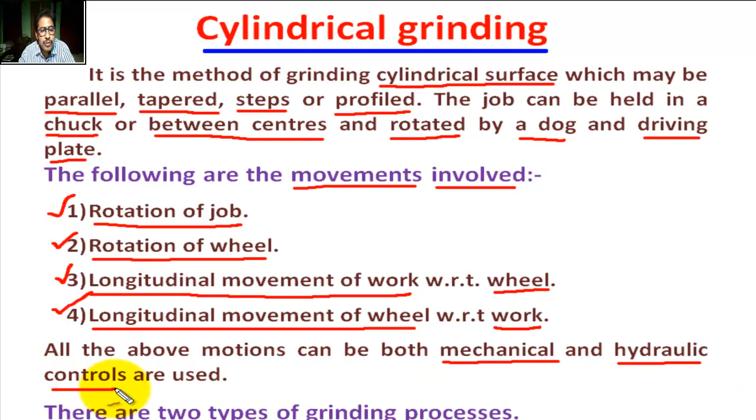All the above motions can be both mechanical and hydraulic controls are used.

There are two types of grinding processes. Number 1, traverse grinding.

The work, meaning cylindrical type work, is reciprocated as the wheel feeds to produce a cylinder. Produce cylinder means the job surface, work surface to be ground, is longer than the width of the wheel face.

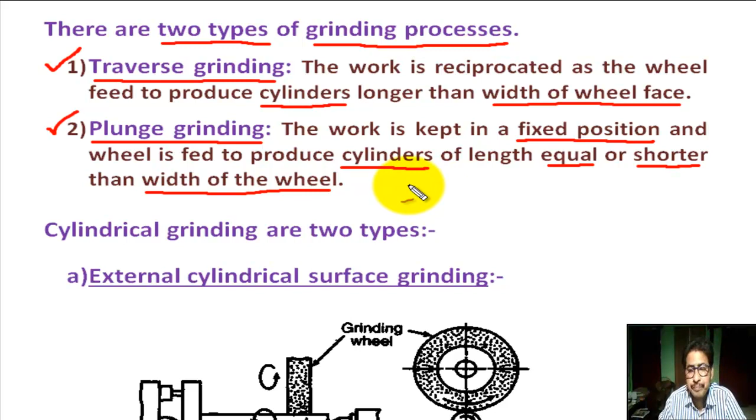Cylindrical grinding are two types: A, external cylindrical surface grinding; B, internal cylindrical surface grinding. Here we do not discuss centerless grinding. For centerless grinding, I developed a separate tutorial, kindly see my separate tutorial.

Cylindrical grinding are of two types. First, A, external cylindrical surface grinding. This is the job or workpiece, cylindrical shape, held in a lathe. This is live center, this is dead center of lathe. This is driving plate, this is lathe dog.

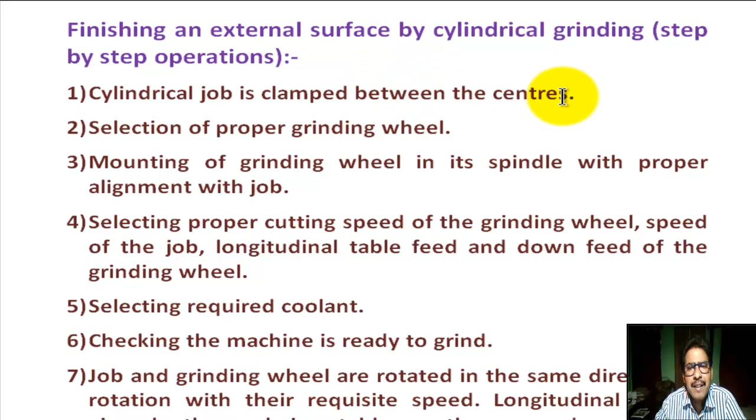Now, finishing an external surface by cylindrical grinding, step by step operation. Number 1, cylindrical job is clamped between the centers.

Number 2, selection of proper grinding wheel, meaning soft grinding wheel or hard grinding wheel.

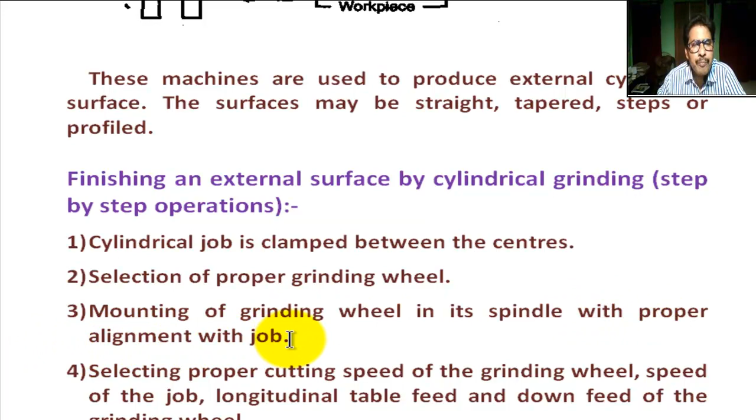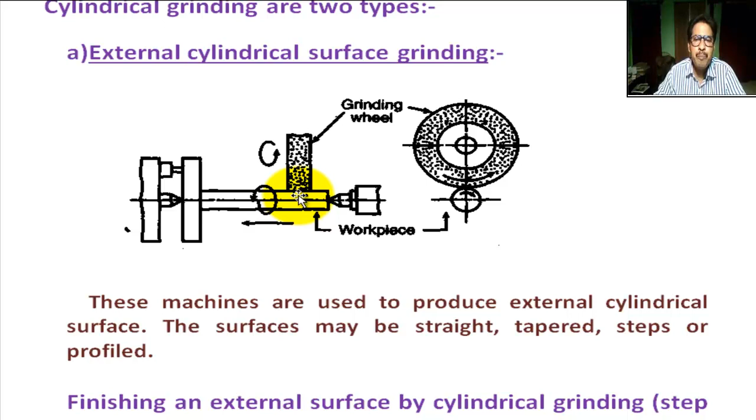Number 3, mounting of grinding wheel on its spindle with proper alignment with the job. That means the cylindrical job axis and grinding wheel axis are in proper alignment, in proper attachment.

Number 4, selecting proper cutting speed of the grinding wheel, speed of the job, longitudinal table feed and down feed of the grinding wheel.

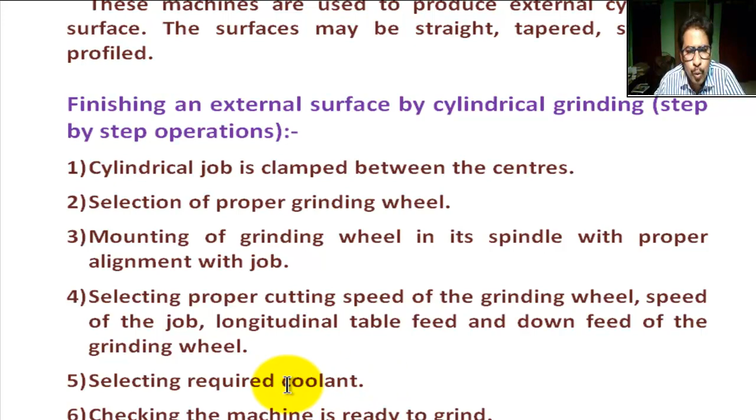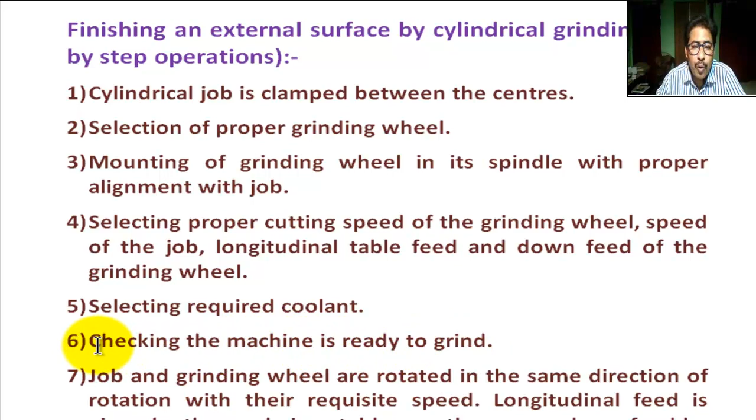Number 5, selecting required coolant. Number 6, checking the machine is ready to grind.

Number 7, job and grinding wheel are rotated in the same direction of rotation with their requisite speed. Here job and grinding wheel are rotated in the same direction.

This is vital. Number 8, use a number of cuts to attain the required diameter of the cylindrical job with proper depth of cut.

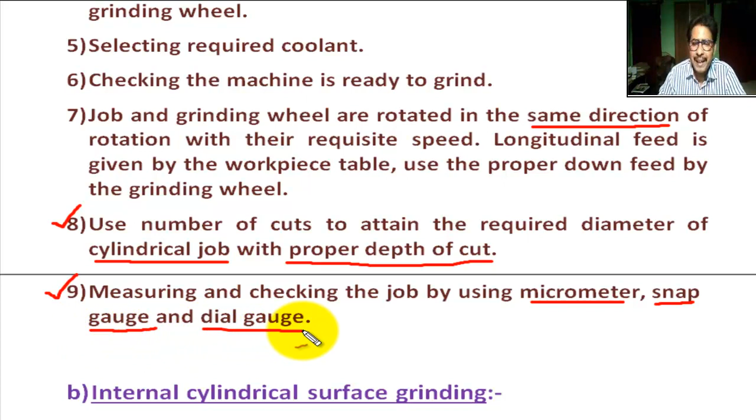Number 9, measuring and checking the job by using micrometer, snap gauge and dial gauge.

Next we learn B, internal cylindrical surface grinding. This is the workpiece, cylindrical workpiece, hollow. Internal surface of the cylindrical workpiece are ground.

Workpiece is held on chuck. This is the headstock of the lathe. This is the grinding head. It is the part of grinding machines, not part of lathe.

This is the grinding wheel, this is grinding spindle. Here the job rotation and grinding wheel rotation is in opposite direction.

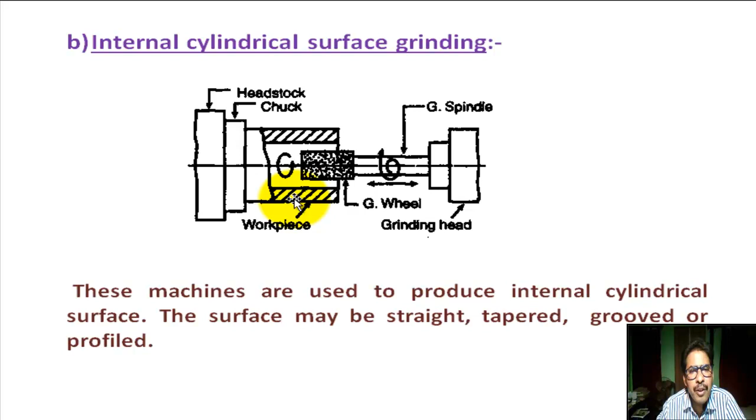Now, finishing an internal surface by cylindrical grinding, step by step operation. Number 1, clamping the bush, meaning job, cylindrical job, hollow cylindrical job, by chuck. Here job is hollow cylindrical job held on chuck.

Number 1, clamping the bush or job by chuck. The headstock receives power from the motor, rotates the chuck, and the table can also be given longitudinal feed.

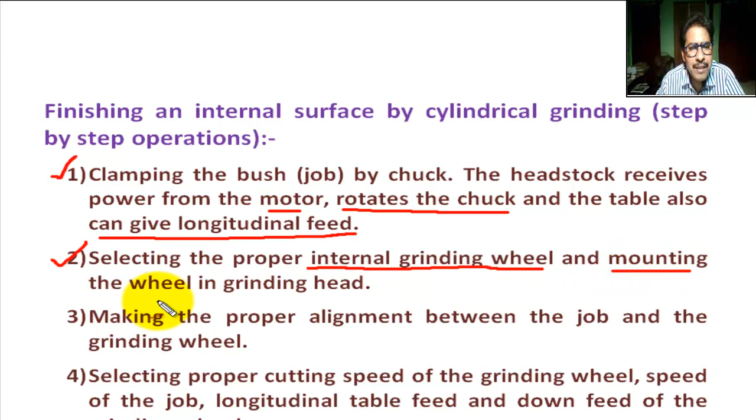Number 2, selecting the proper internal grinding wheel, meaning the grinding wheel may be hard or soft with respect to job material, and mounting the wheel in grinding head.

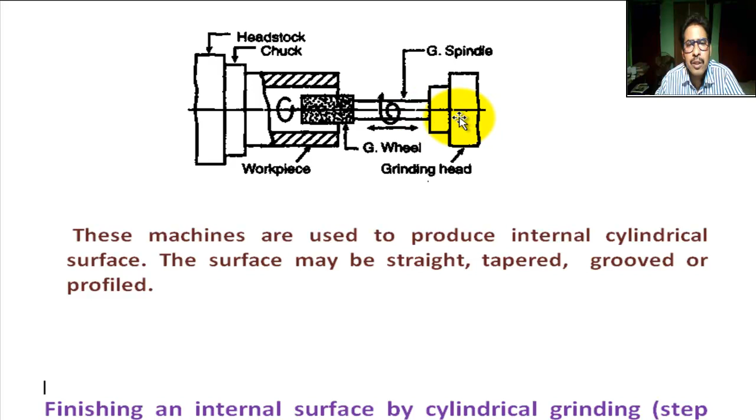This is the grinding head, this is the grinding wheel, this is grinding spindle. It is part of grinding machines.

Number 3, making the proper alignment between the job and the grinding wheel. Grinding wheel axis and job axis may be in proper settings or arrangement.

Number 4, selecting proper cutting speed of the grinding wheel, speed of the job, longitudinal table feed and down feed of the grinding wheel.

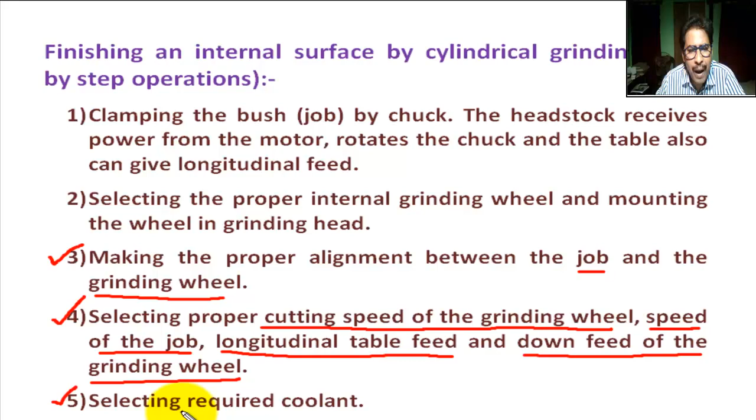Number 5, selecting required coolant. Number 6, checking the machine is ready to grind.

Number 7, finishing the bore. Bore means internal surface of the hollow cylindrical job. Finishing the bore of a bush, hollow portion, is being done with proper speed of the grinding wheel and job.

Here wheel and job rotation is in opposite direction. It is vital. Lateral and down feed by the wheel.

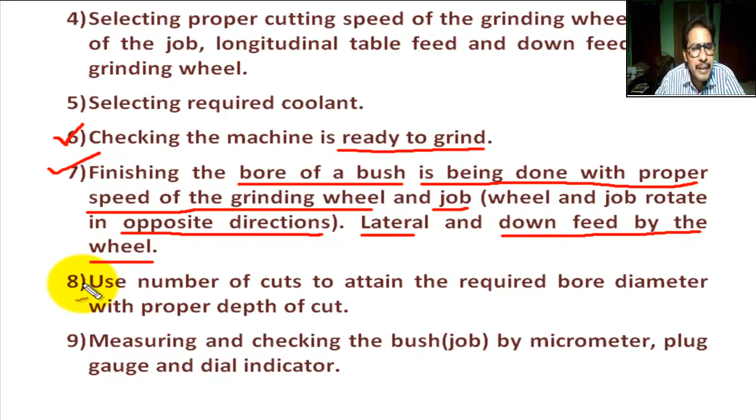Number 8, use number of cuts to attain the required bore diameter with proper depth of cut. Bore means hole diameter.

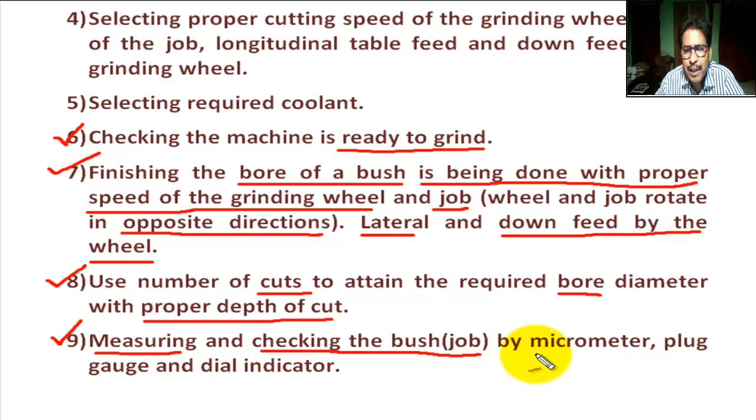Number 9, measuring and checking the bush, the hollow job, by micrometer, plug gauge and dial indicator.

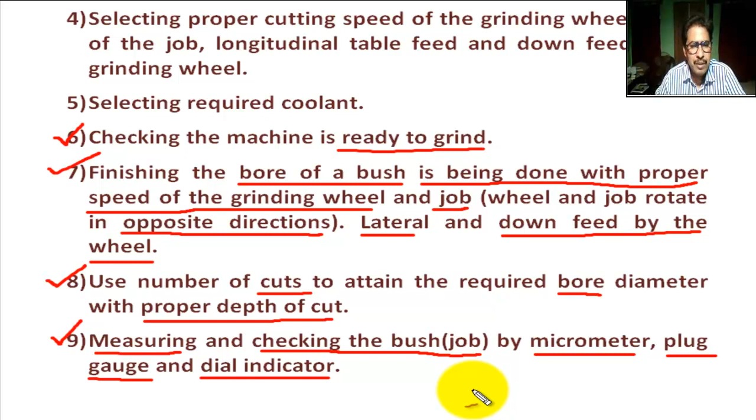It is clear, my student, what is cylindrical grinding.